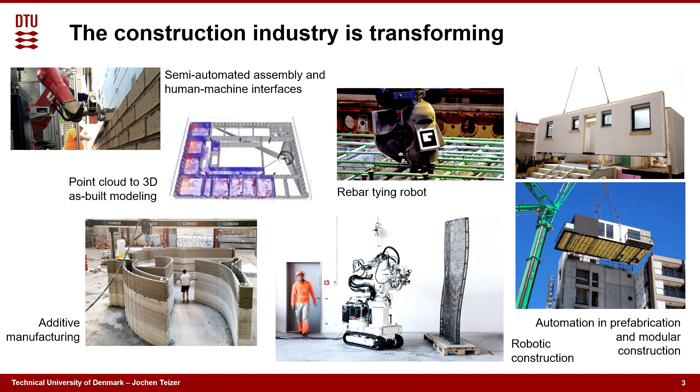Here's a job site in Aarhus in Denmark. We're actually involved in this project, currently under construction, I think this was taken about 6 months ago. I want to give you an example about deep learning. Deep learning basically allows us to train models to yield information we have not known before, or couldn't get as easily.

This job site is called the green construction site because we would like to avoid emissions. In particular, in my work package, it's emissions from construction equipment, greenhouse gas emissions, but even noise. We've collected thousands of images with a time-lapse camera, and we are doing training to actually create information about what is our performance.

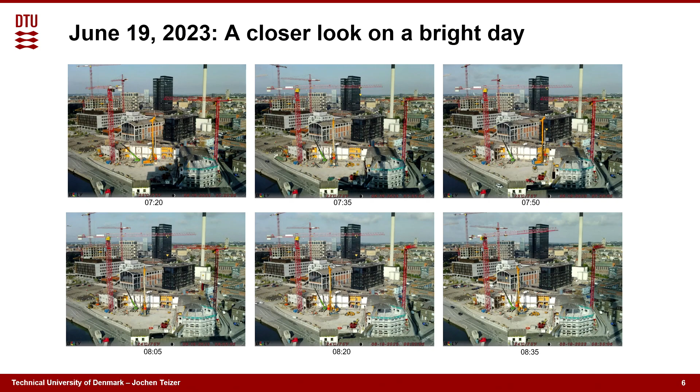As you can see, these are just six images. It's rather hard for our brain to see what has changed from one image to the next. Here we can take computers to help us automate this process, and that's one part of AI: to automate, to make things simpler, and have us spend time on things we actually should do as humans.

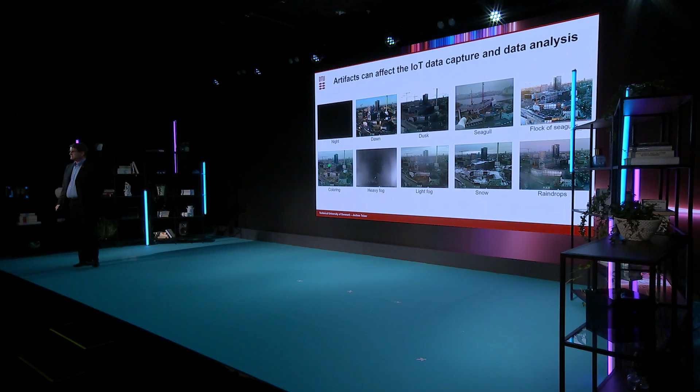And yet there are challenges with AI, or in this case deep learning, because some images are not useful. For example, images that are completely black because they were taken at night, or there's fog, or rain, and so on. These are challenges we have to overcome, and as researchers we design algorithms that can cope with that, that can fix it.

How does it typically work? Some of you know already, but for those who don't, you have to train it. You have to go in manually and label every image for the information you seek. In this case, we have 15 or 16 different machines that we want to locate. Are they rotating? Are they not rotating? Then we figure out what are they doing? Are they operating? Are they not operating?

We also use portable emission measurement systems that tell us the state of the engine. Do they work? Do they not work? How much emissions do they emit? And so on. I'll go to that a bit later in my presentation.

What I want to show you is a result from more than 10 years ago, where we did computer vision-based detection and tracking of construction equipment. Ask yourself, is any of these solutions ready and being applied in the market? Is anyone of you using this on a construction site if you work in the construction industry? Probably not, right? And yet we can detect when trucks arrive, how much time it takes to load, typically 2 to 3 minutes is the productive state.

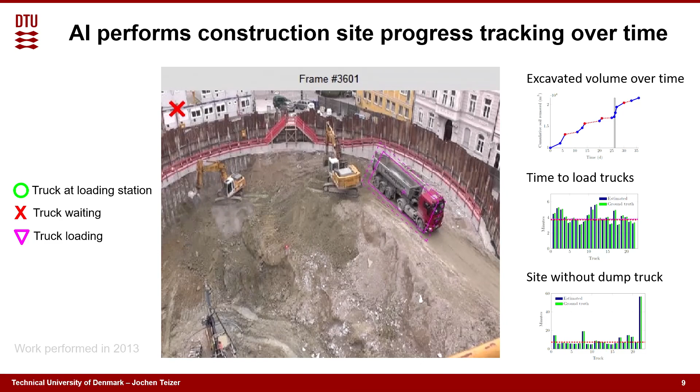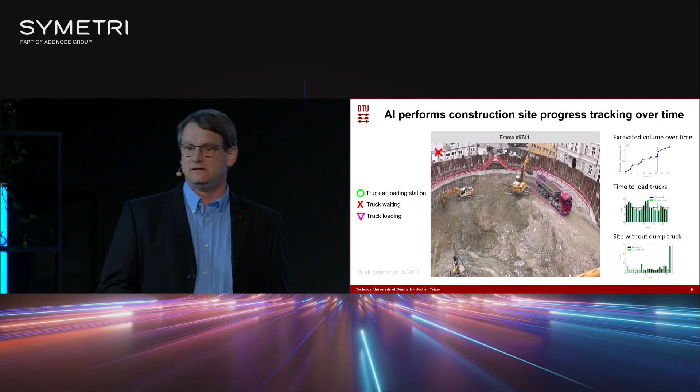Then they leave, go back into traffic, come back, and we realize that around 5 o'clock in the afternoon rush hour kicks in, and actually we shouldn't work anymore, we should stop because traffic jams occur, right? This is what we were doing 12 years ago, and yet we still look out for solutions that we can simply buy.

Digital twins, very quickly: we have a construction site, like we heard it, we have humans, project managers, construction workers, often forgotten.

It's cheap labor, we often say, and yet we treat them like that. They don't reach retirement age, many of them. They wear out, their body literally wears out. We don't take good care of them, and yet they are a vital resource for every one of our projects.

We know that if we have to do some maintenance at our home, we can't get people signed up to do the job. And yet we have building information modeling, a method introduced a couple of decades ago, that became really popular about 15 years ago. And yet, where are we with BIM? We create static models, and yet maybe they are not suitable for the construction phase.

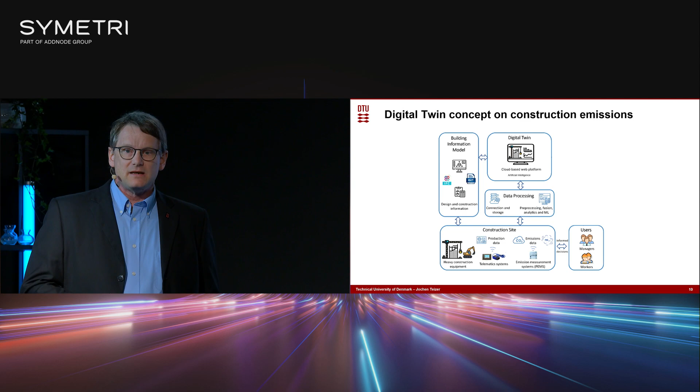And here comes data. We talked about data a lot. I think data is one ingredient, but actually I'm not interested in data. I'm interested in information, and even more, I'm interested in the next level: knowledge. And yet a digital twin can enable us connecting these dots, and AI is a component of generating information that is then eventually visualized or available for decision making during the construction phase.

And of course, we know that we have services that we can relate back to the users, to the managers, and these are tools, dashboards that present them the information in an easy, accessible way. That's good. I would call this human-assisted artificial intelligence, where we actually try to give hints of what we should do better and learn.

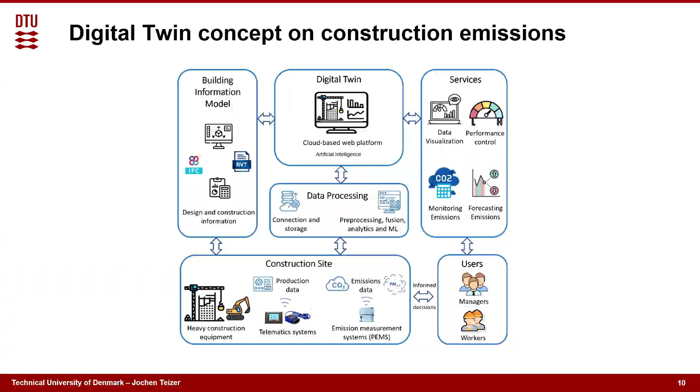I want to give you a motivating use case, and I've been in this for about 20 years: construction safety. Just two examples from Hamburg, this was in November, and then one from Stockholm. Many of you in Sweden know about that. Five people got killed on each side. Yeah, it shouldn't have happened, but for our records in Sweden or even in Denmark, five deaths is a lot. And in Denmark, we have, I think, four last year in total. Yeah, that's a lot. It's a shocker. It's a really shocker.

For a long time, we have focused on the safety pyramid, where we focus on eliminating fatalities. Actually, research has told us we can't eliminate fatalities, they're so unpredictable. You can't design them out. And yet then we thought, okay, let's design out injuries. And then later on, we focus on close calls, events that almost kill someone or injure someone. And yet we figure out that doesn't lead to the goal, because the accident statistics tell us we are leveling out. We don't achieve the goal of zero accidents.

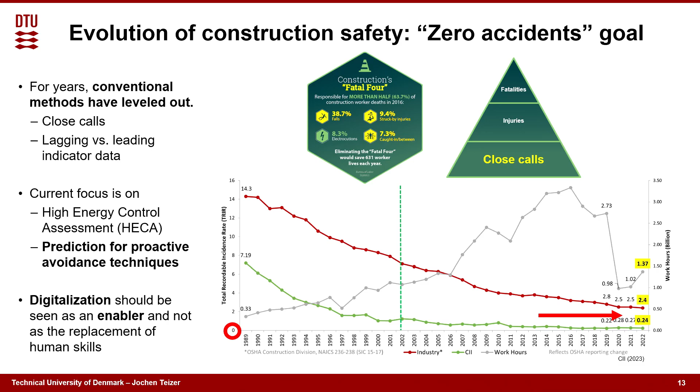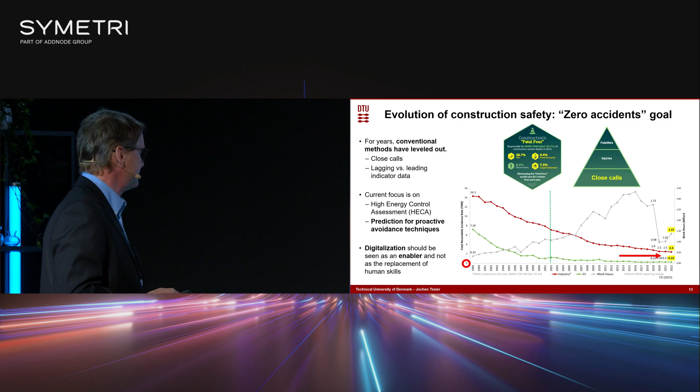And that's where we focus currently on HECA, high energy control assessment, where we actually take the energy level of the root cause into account, and the impact on the human body, because the activities you perform can have quite different outcomes depending on the energy involved in the task. And then we focus on prediction for proactive avoidance techniques. I came up with that term also 15 years ago, where I said, really, we have to change the way the industry works. Digitalization should be seen as an enabler, not a replacement of human beings, but trust me, jobs will have to change, whether people like it or not.

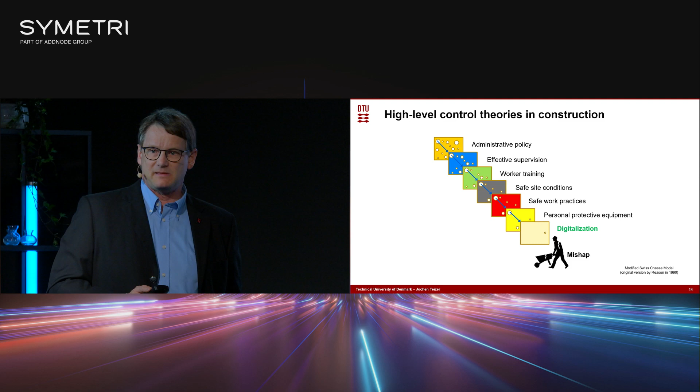A Swiss cheese model, when I talk to safety engineers, they always tell me it's an old hat. And yet I would still challenge them, saying each one of those layers you could think of like a Swiss cheese, which has a hole, and if you run through all the holes, you actually hurt someone or damage equipment, should have an additional layer. This model was invented 30 years ago, and I believe there must be an additional layer called digitalization. That's one way to move forward. A lot of the industry is resistant to that, because they think they can solve the safety problem through management. And I agree with them, it's a good way, but it's not the ultimate answer.

So what is a digital twin? Think about a construction project that has stakeholders in place, and we have the knowledge domain that these people have, or actually rules and regulations from governments, and they can help us create a digital representation of the object, building, or infrastructure we want to build. And yet, through the knowledge domain that we have, we can actually analyze what we want to build. I call this prevention through design and planning, because we can do this ahead of our project start, or before workers start working. I'll give you an example.

This is how it has been done a long time ago. I must give credit here to Skanska Oy in Finland, which has actually helped us with a little seed grant a long time ago.

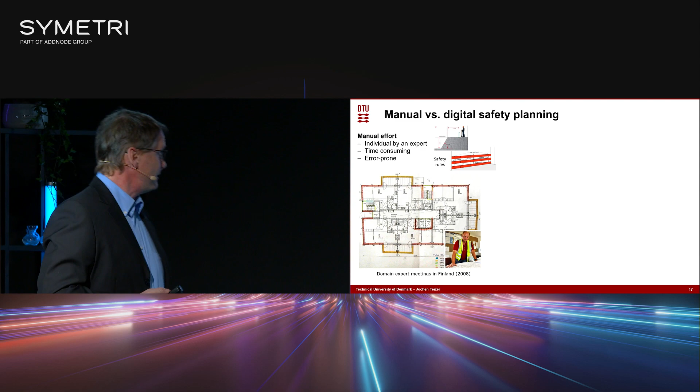We analyzed with them how do we actually bring BIM on board to solve this problem, because people literally use CAD drawings, printed them, and draw on them to figure out where the hazards are, like balconies. This knowledge sits all with this expert, a great guy, by the way.

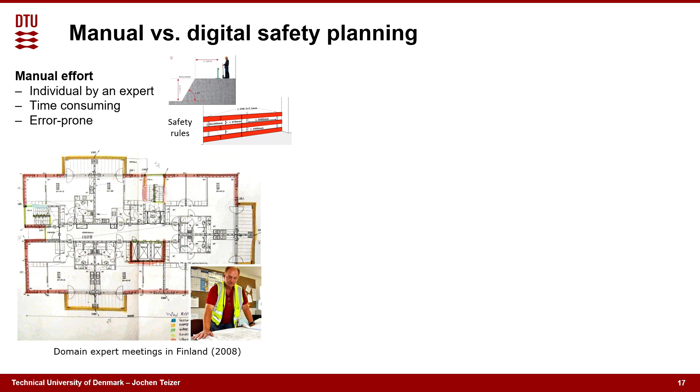Yet why don't we go to this level where we have a BIM model and can actually design these safety elements like guardrails and hole covers automatically? Ask for these tools, do they really exist in the market right now? Maybe not.

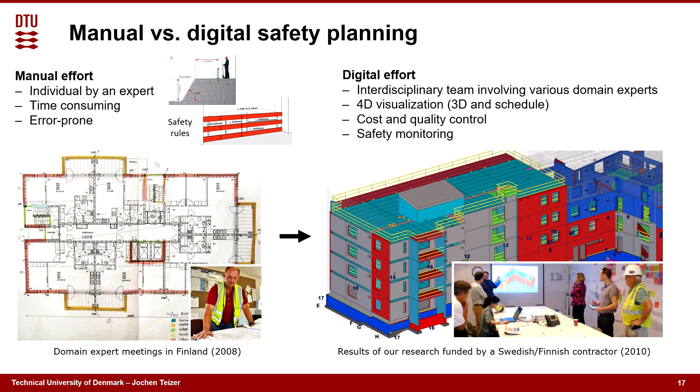And yet collaboration, a big word today, I know. Teamwork, right? It brings everybody together that works in a team, from structural engineer to architectural engineer to safety engineers and so on, project managers.

I'll give you an example why this matters, because in every country codes and regulations are different. You actually have here a benchmark model. Like in research, we always measure and compare to see does it work, what we actually create. Here is our algorithm that applies to EU regulations and to US regulation.

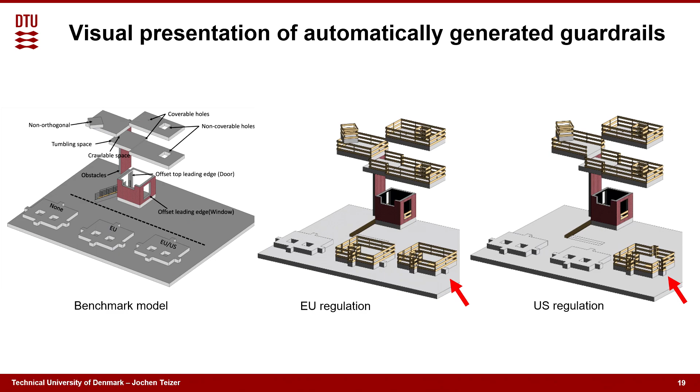You can see, even though we have a tiny workspace, just less than half a meter, it makes a difference in certain countries. Here, this is when our algorithm actually is being tested, and we can figure out that these spots are actually protected. These guardrails are automatically planned, no human interference. Now there are some people out there who design these guardrails manually, great work by the way, but we do it automatically.

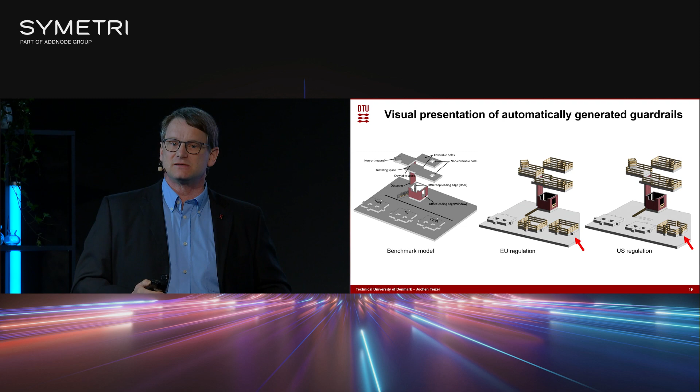I think we need to provide simple, easy-to-use tools that practitioners out there, who have no experience with BIM and don't know how to use Revit or any other software, can apply. That's how it has to work.

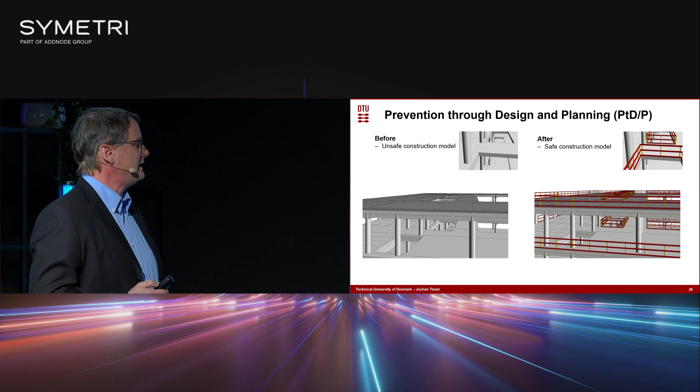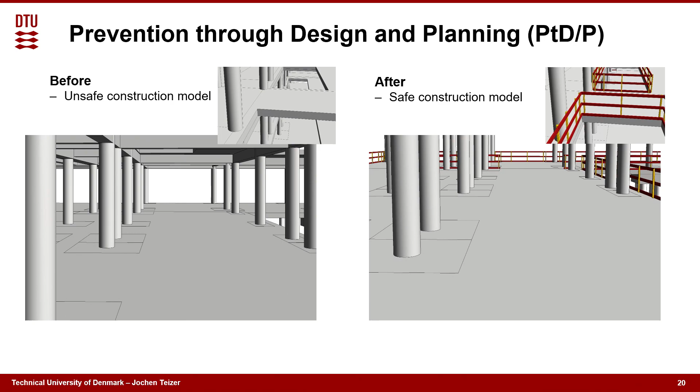Here you see a difference between before and after, and you can clearly see the difference. Of course, there is an object that had no guardrail -- you've probably seen that. If not, you need to open up your eyes next time. You can see that these things are actually quite well executed.

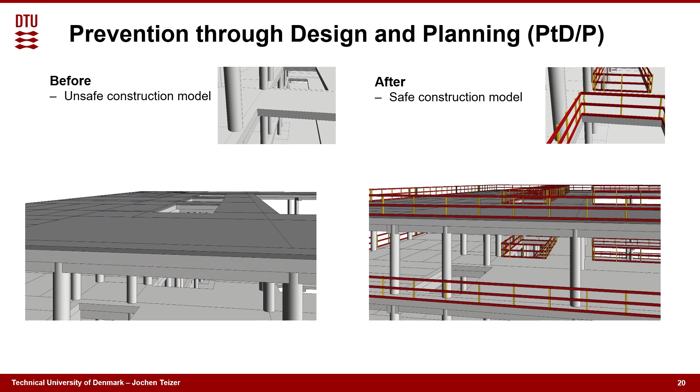And yet we actually take the 4D schedule into place. Here you see a guardrail that is not in place because there's actually a lifting operation coming up the next day. Like I talked about the construction schedule, the tool that we have developed allows you to simulate and predict where these falling hazards occur. These are shown on the left.

Top, you see this 7-story building. There's workspaces that, as you move the building up, appear and then sometimes disappear because you have to install the facade element. Likewise, you can track the quantity.

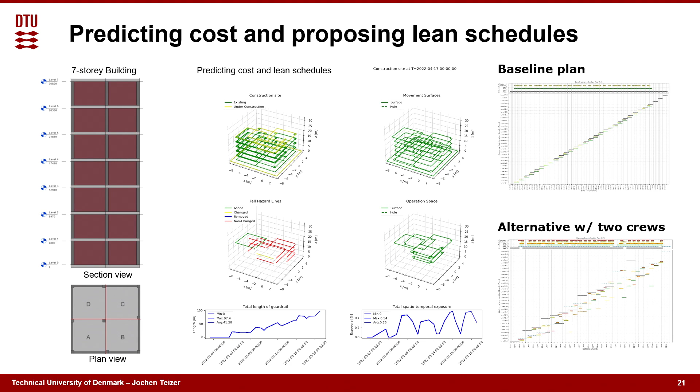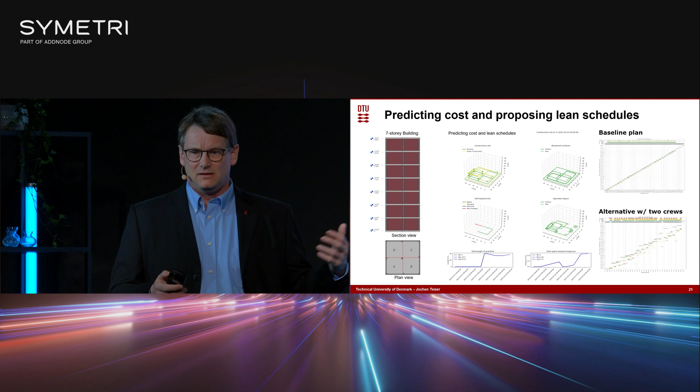You can actually associate -- I'm not talking about cost when I talk about safety, rather the investment. You can talk about the investment in safety. You can quantify it, and actually create, according to a baseline plan, alternative plans -- for example, not just one crew but two crews, thinking what the impact on the construction site looks like if I use multiple crews instead of one, and also the impact on applying it to safety. Nobody will be left out on that point anymore.

So I'll go a little bit into AI for prediction, for inspection, and compliance checking. Now let's assume we have designed out these hazards, a very important first step. We design out our hazards before they go into the workplace. We actually want to go in and check.

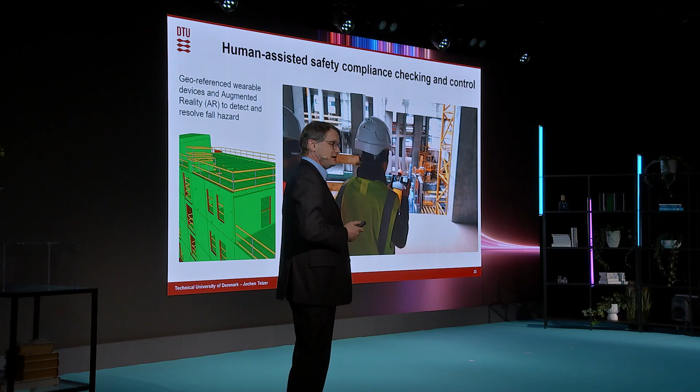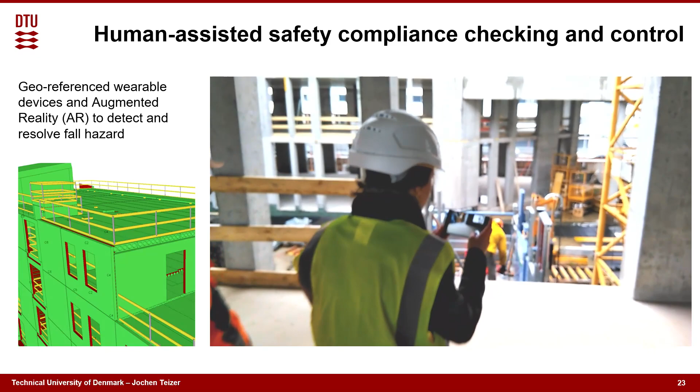Here's augmented reality, an application we developed five years ago, yet no tool is available in the industry like it. It still includes the human in terms of figuring out if there's an issue. We draw the information from the BIM model once, because we have georeferenced ourselves to the location, and here we can visualize that there should be a guardrail in place. Of course this has been staged, but again, we have a prototype -- hey industry, pick it up, no problem.

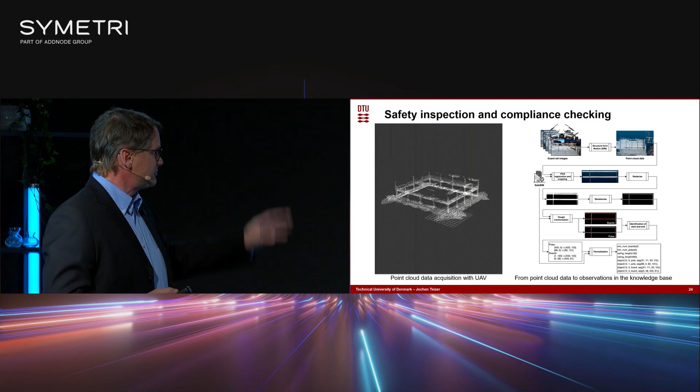We move forward. Of course we envision that we can fly with drones, unmanned aerial vehicles. We can create point clouds and analyze those point clouds. There's a process we have developed -- of course we write research articles, more than 60 -- but according to these combinations of hazards or hazardous conditions that could exist for a guardrail, we can analyze it.

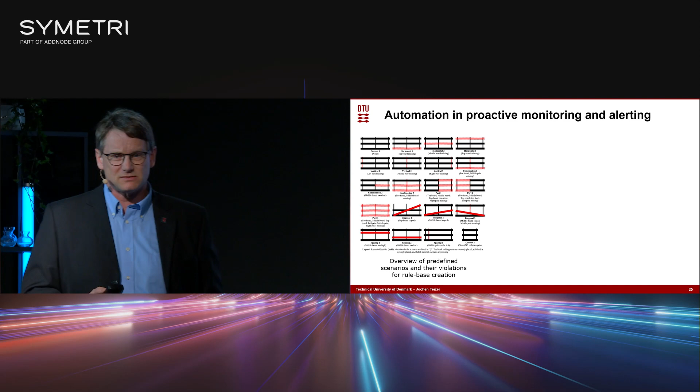This is a job site again from Finland. I must say the Nordic countries are really good, allowing us also to get access to job sites. Not always common, no -- we challenge that industry for that.

And we actually fly with drones to see if a guardrail element is missing. Our algorithm tells us, yes, the middle board is missing, or the toe board is missing, or the top board is missing. So autonomous flights with UAVs is not an issue. You can have this communicated through a dashboard -- of course, we don't focus on the dashboard.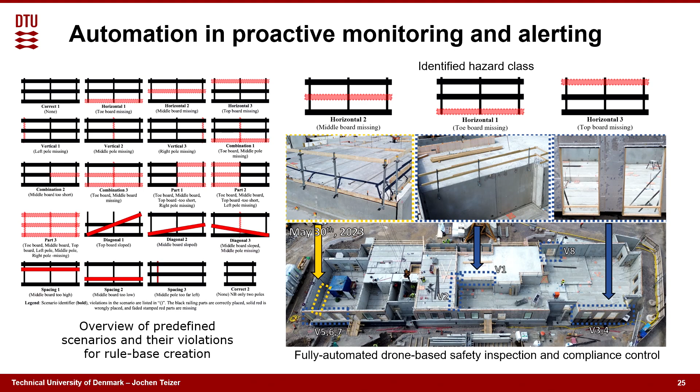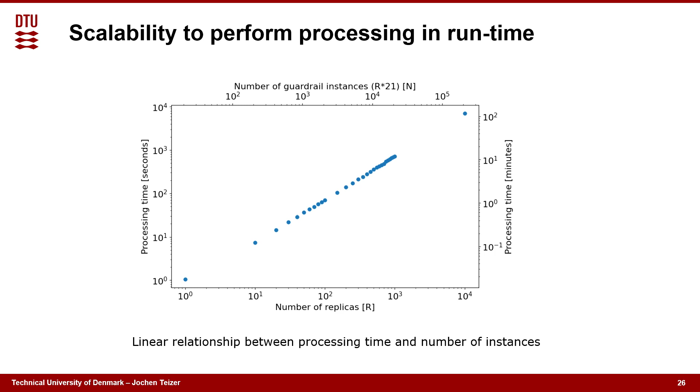That's an easy task. About computational processing time, it's, I think, very important for software companies to figure out: is it scalable? Can we do it on a real project with thousands of objects? Yes, it is. You can see it here.

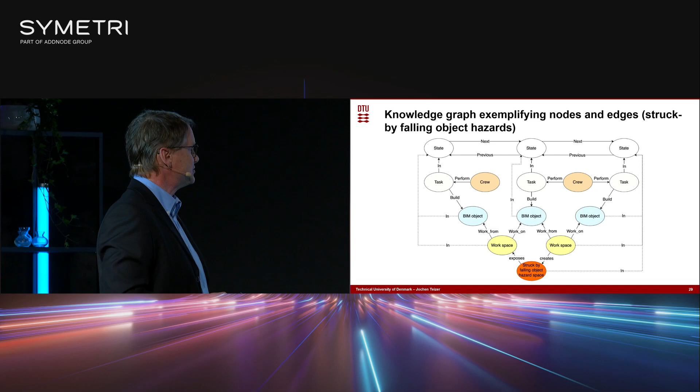Internet of Things, it's all about knowledge graphs and queries. So we have to actually formalize the knowledge that is in our brain and bring it down to a computer and tell it, do it this way. So here we have a knowledge graph, actually for struck-by-falling-objects-from-above, assuming we have an operation with a crane lift and a load hanging on the crane hook. Here is a knowledge graph where we precisely define what situations can occur.

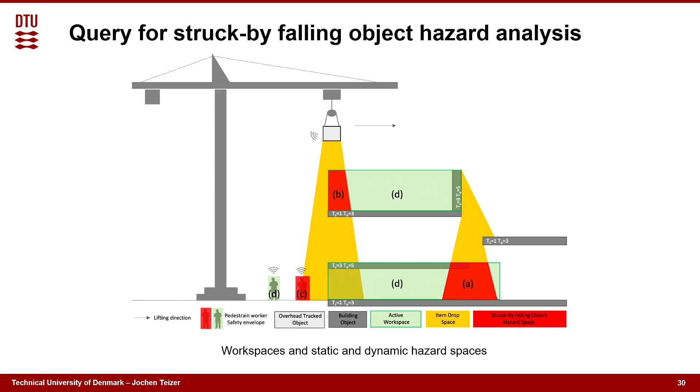And then we can actually do a query. Here I have illustrated, in a cross-sectional view of an operation, where a load could drop - you see the red space here, which is a workspace that by itself is hazardous, but it could also drop on a worker at the bottom, which could then likely be deadly. This is again a paper we have written on this topic, really nice work from my student, Carsten Johansen, excellent PhD student.

And then, once we know where these things should occur, we actually use AI computer vision on a camera to detect workers - are they below the crane load or not? Here are some results we have been getting. And the industry has already been looking into that, of course. But here it would be nice to pinpoint and georeference where these workers are on the job site.

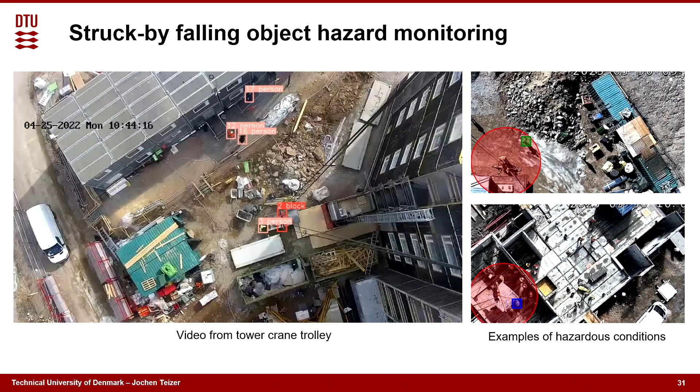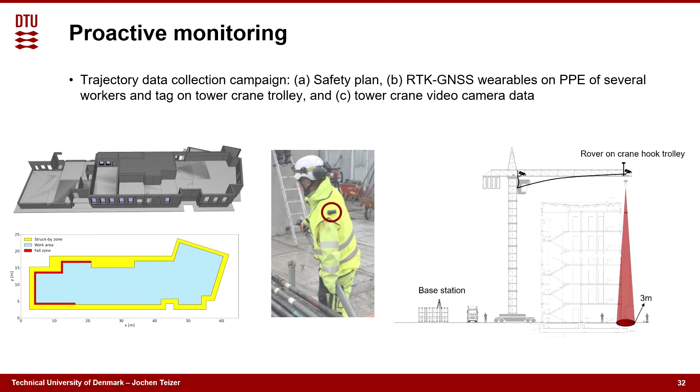And here we take this safe BIM we created earlier, for that stage of the construction schedule. You see it here on the bottom left - red means fall hazard, and yellow could be a struck-by zone hazard from equipment outside. We also take an RTK GNSS tag on the worker, a GPS device that's really accurate, down to the centimeter level, of course only outdoors. And then we combine and fuse the data.

Data fusion is a big thing too. And here you see a result about the trajectories from 5 workers throughout half a day. You actually see the crane swings, and every time a load is above a worker or very close to a worker, it actually creates one of these red circles. It's really interesting - such information hasn't been created yet.

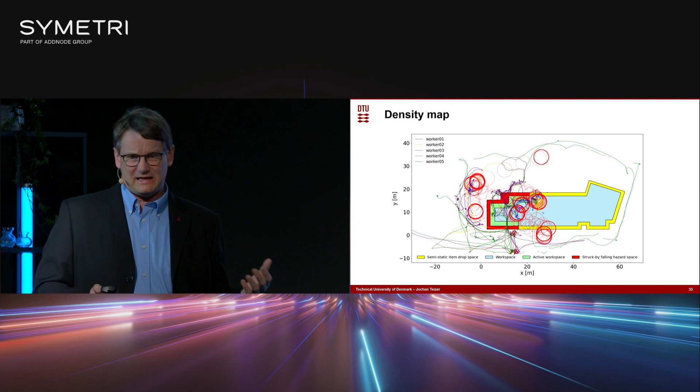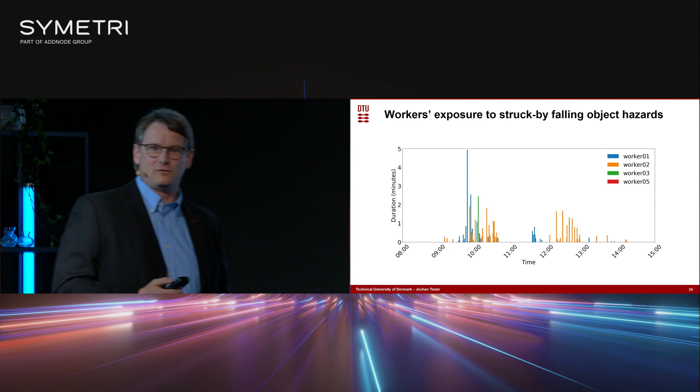And actually AI throughout this process has helped a little bit. You can pinpoint and say at what time these situations occur. We suspect from other data, from ground moving vehicles, around lunchtime is a big issue, or break times, because the sugar level in the body decreases so much that people pay less attention. But you can figure out other things too - that around 10 o'clock trucks arrive on the job site, it suddenly gets very busy, a bit chaotic, and things happen. Of course, this subcontractor was very skilled in handling that.

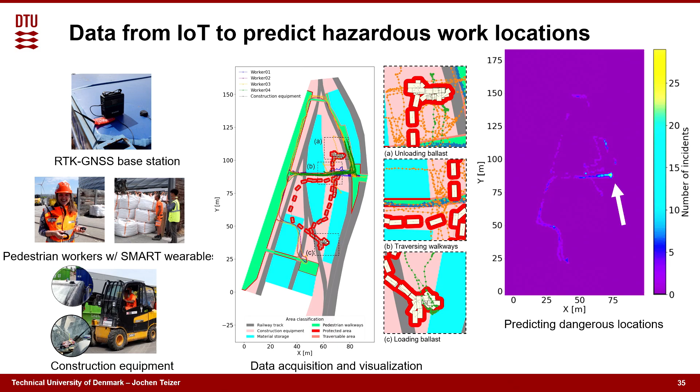We can find those interactions once we process the data, and actually predict where future incidents are very likely to occur. In this case, we want to install concrete barricades, if they have not been already in place, to protect the workforce. So there's a new dimension, actually helping the safety manager or safety-responsible person to put things in place they haven't thought about, or actually measure what they designed originally - has it been compliant? Has it actually been good? So giving them tools in hand, measuring that their work was actually good, and actually praising people.

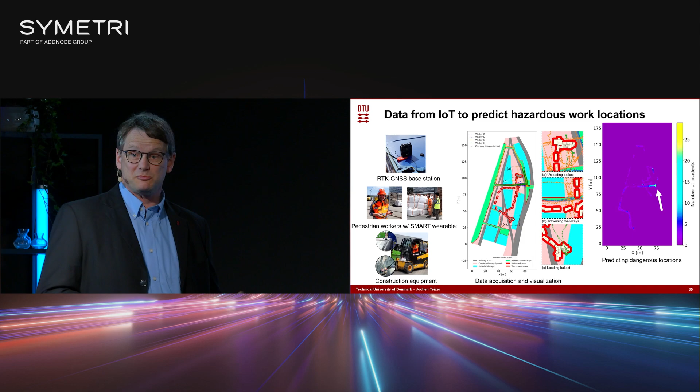Active personalized learning, next level. So right now I presented already 3 stages. Safe BIM, designing out hazards in the first place so they don't appear in the work stage. Second is to track what's going on and actually take real-time control, like fixing it if needed.

We have, by the way, also technology on that - I'm not showing it, to warn workers in real time. That exists as well. I'm not showing it because it has nothing to do with AI. And last but not least, we need to look into how do people learn - workers, yeah, of course workers are also people, humans. Here is an AI training game. I know several companies do have virtual reality safety training games.

Nowadays there are really good ones actually. Some of my students graduated, went to big engineering firms, at least in Denmark, and built one game. I'm very proud of that student because, hey, he made it happen, right?

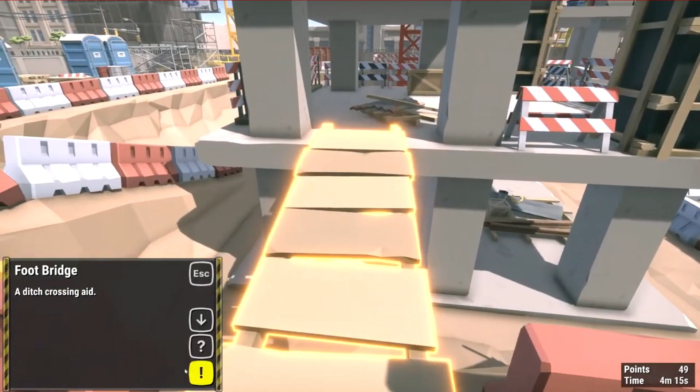Designing a product that actually helps—that's not this game, that's our game. This is already 3 years old. We won a prize at a big safety conference. Here's one little thing of how we can help people, workers actually train, expose, and help them understand what these hazardous conditions are.

But more than just creating a visual interface, they actually collect data about the users. And that's very important, that's a big difference. We actually see where they walk inside, and you see here all these different trajectories with different colors for different players. The bigger the circle, the more dangerous the event was.

It's a bit difficult to see, but there's an excavator being very close to one of the players, and we believe this shouldn't have happened. So we actually have objectively collected data that gives a trainee the personalized feedback they need to help change their behavior before they go out on the construction site.

Does that make sense? Of course, this is just one training scenario. We believe this can be the steps toward safe BIM. We can take real data from a job site, but we can also train them, and I think there are good lessons learned from doing it.

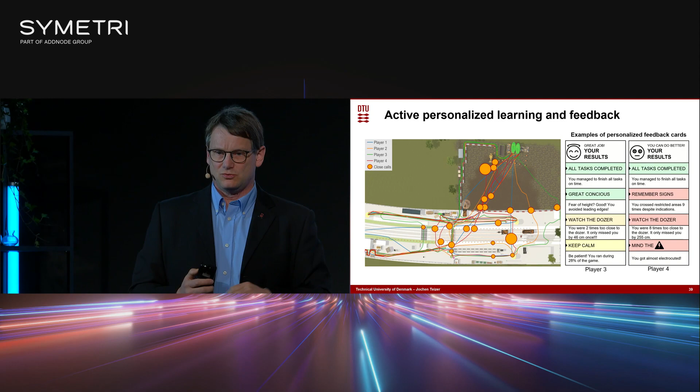As a matter of fact, often people hammer down on workers, especially in companies which don't have a good safety culture. We believe such games can also be used for praising workers, reinforcing what they've been doing well. I think there's also a mind shift that has to happen.

Here is a tool I've actually been using, where we take augmented virtuality. Many of you know augmented reality and virtual reality, but there's something in between called augmented virtuality. I think we were one of the first to gut an angle grinder and bring it into a hazardous learning game where you're exposed to many different hazards.

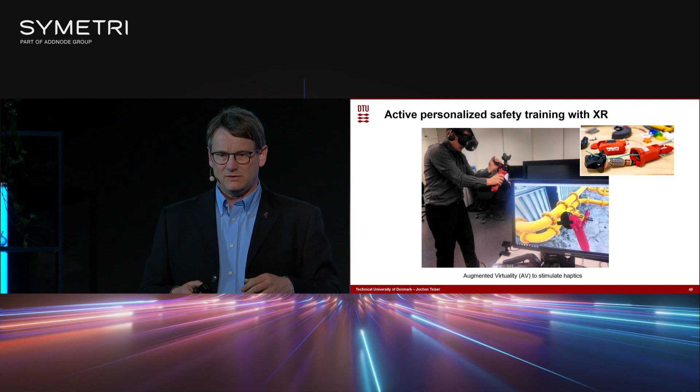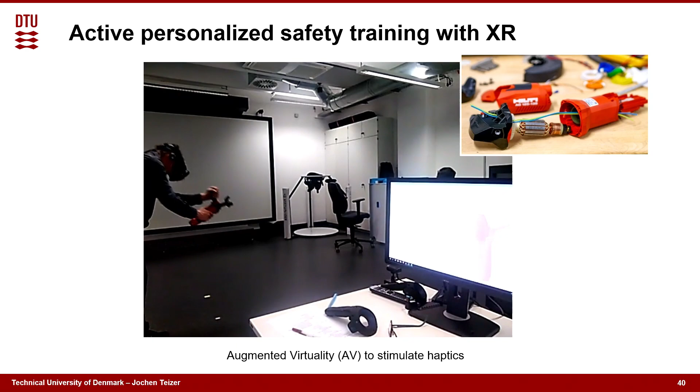And what you see here—I think we need sound here if it's possible. And you can see my reaction, really shocking.

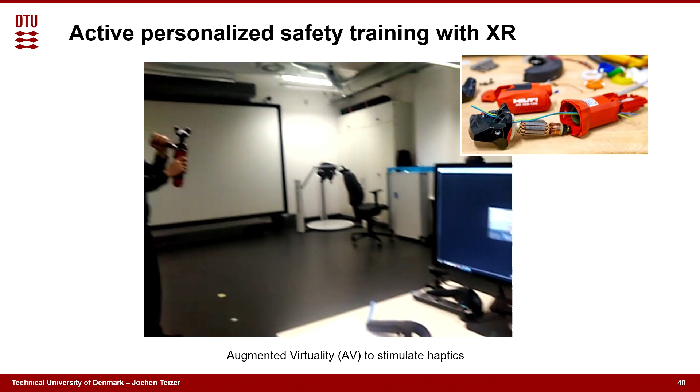As a matter of fact, you see that with participants. This is a replication of a true incident in the real world, where somebody cut into a pipe and killed 5 of his colleagues in Germany at a chemical plant, because they didn't know there was still liquid flowing through one of the pipes. One of them was shut off, the other was not, and it led to the death of 5 people.

You can imagine, right? Augmented virtuality in this case was used to enhance the haptic feeling, having a real machine in place and turning it on, ensuring it feels like reality—that's a real big game changer. By the way, sound as well. Sound in VR is very important.

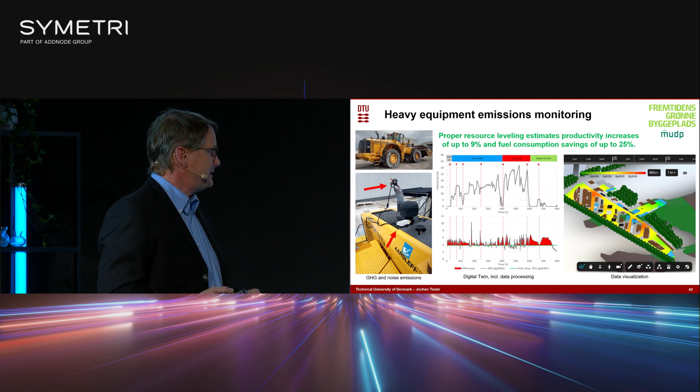Maybe quickly, AI for other purposes—I think I'll touch here a bit on points people made before. Actually, a Danish contractor, Aarsleff, has been working with us on tracking emissions. We use portable emission measurement systems as well as simplified emission measurement systems to ensure we can track emissions. We can very clearly see when the machine exceeds emissions limits, and when not.

We actually did noise simulations too—it was mentioned just in the presentation before. There's a lot of stuff that hasn't been linked yet between simulation tools and building information modeling. One of them is actually noise, or was noise.

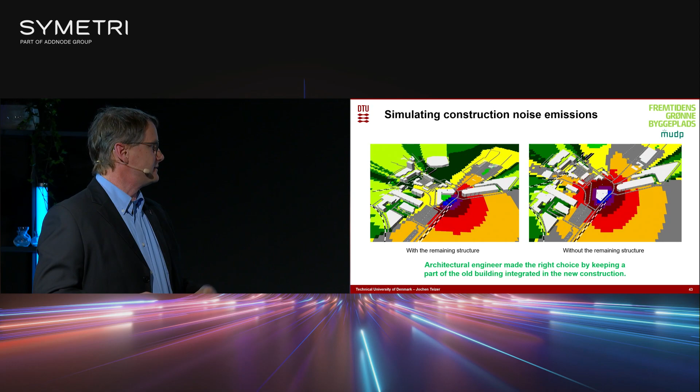But here you can clearly see that keeping an old structure in place is actually a good thing, not tearing down everything and building new, because the noise doesn't penetrate back into the city, towards the harbor front, to the bottom right. I think you can see that here as well.

Robotics is also a big playing field for AI. What I very much like is the circularity concept—we should reuse materials, especially prefabricated materials. Here we have a 3-month project with 2 master level students who had no understanding of BIM at all, but a little experience with robotics.

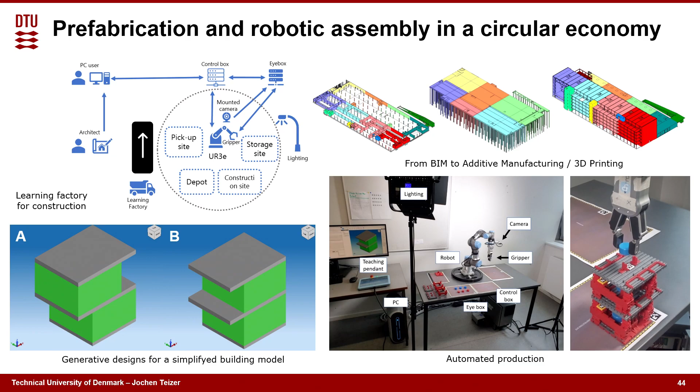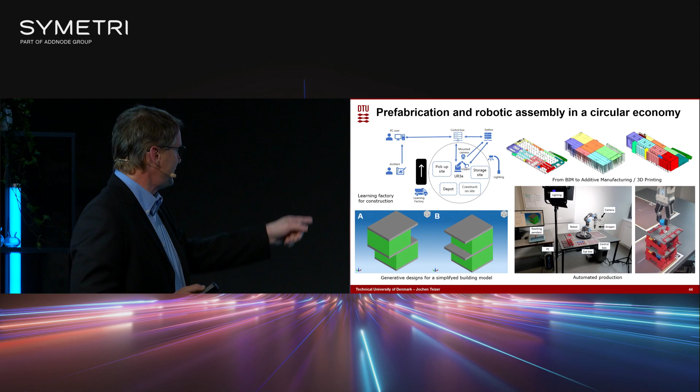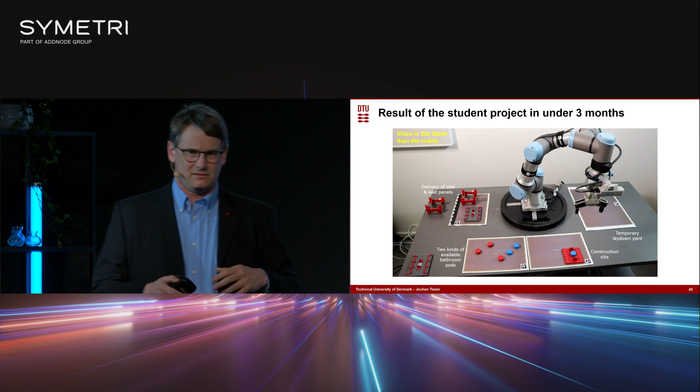They came up with design alternatives that a user can select in the middle of, let's say, the lifespan of a building. First they choose a design, and after 40 years they say, okay, I want to restructure my building—let us build a new type of building, like version B. What I'm showing you here is 20 times faster than in reality, but a robot very much applies AI, doing a lot of the tough load of figuring out where things are and what I need to take.

So, of course, a human currently supplies the materials. Here we have a bathroom module that's being placed, but the robot otherwise can figure out where and how to place based on vision-based detection and tracking. And of course we use QR codes just for control.

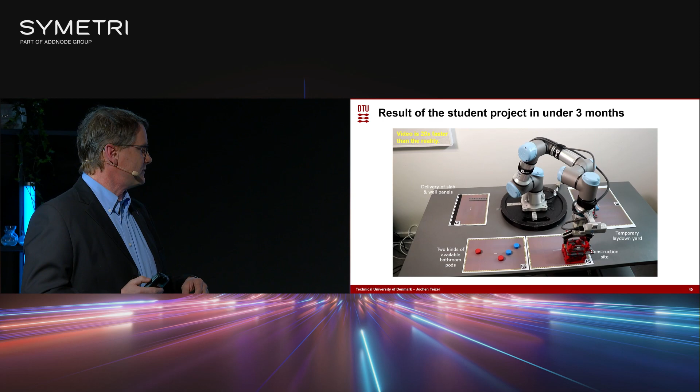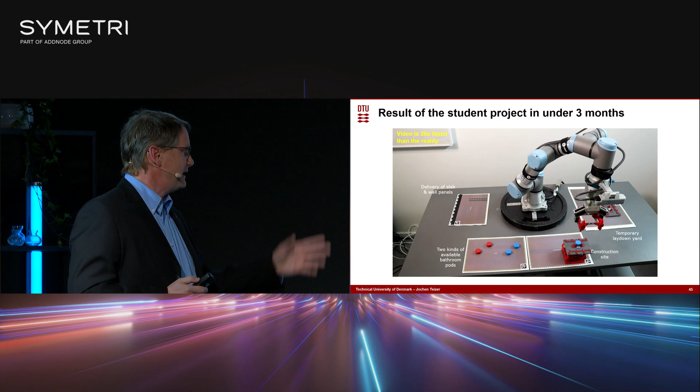But here the building is set apart. This was scenario A, and now let's say the owner says, I want model B, and the robot actually takes the existing pieces back into place, but builds version B instead. I think it's pretty cool what can be done in a lab environment like that, yet a robot arm like this you would never place in the real world. It's way too heavy.

We should recycle the information, actually bring it back to the people so they can use it on the next project. We have experience, a lot of trade workforce, engineers and managers out there with a lot of experience. We need to gather it as quickly as possible and actually create evidence. Data is there, but the data is raw and not meaningful.

We need to use evidence so people trust it and apply it. And then reactive - many of the things we do nowadays, we'll do it on the next project. No, we need to be proactive, doing it right away.

It requires behavioral change, importantly in the construction domain. People are not convinced if you impose it just on them. You need to make them use it.